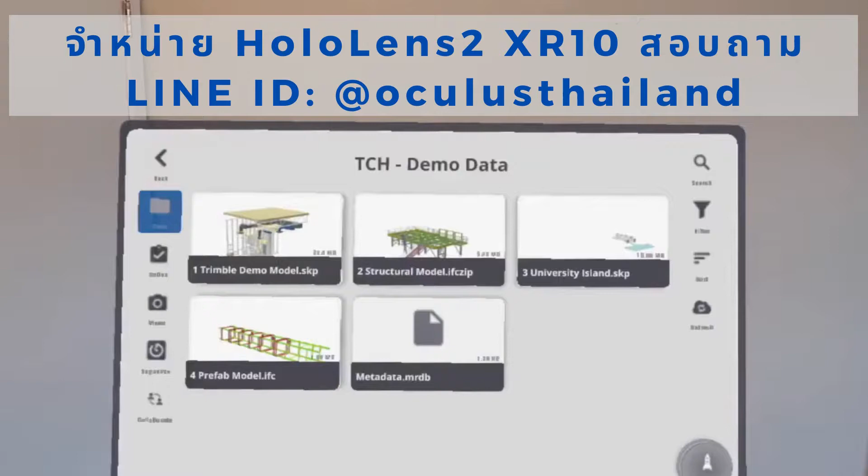Today I'm going to take a few minutes and demonstrate the Trimble XR10 headset utilizing Trimble Connect for HoloLens. To start out, within Trimble Connect we'll select our model and launch that model.

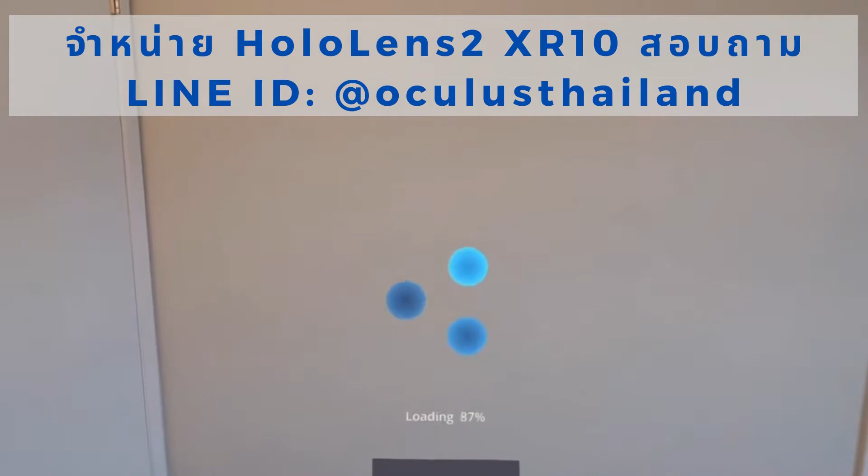The first thing the headset will ask us to do is spatially map our surroundings, getting a good look at the walls, the floor, and the ceiling where we're standing. Then we'll air tap to anchor that model wherever we'd like.

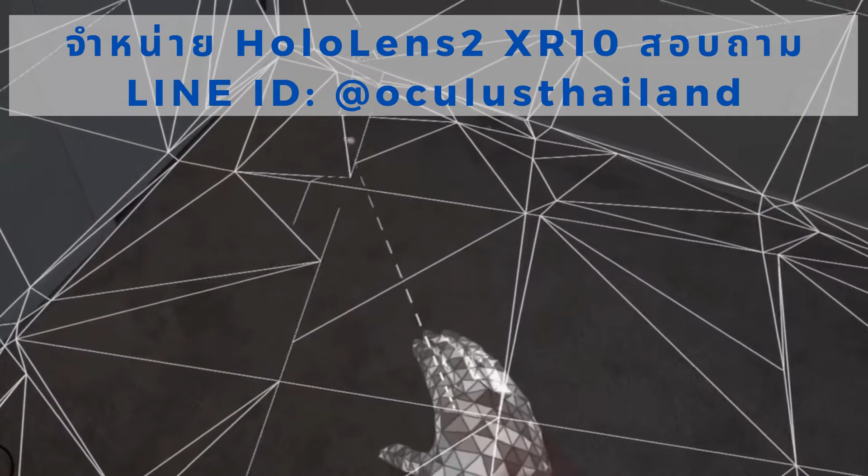I can anchor it onto the wall, but I'm going to choose to anchor it to the floor. I'll use my hand to do what we call a claw, and it'll now anchor the model to the floor.

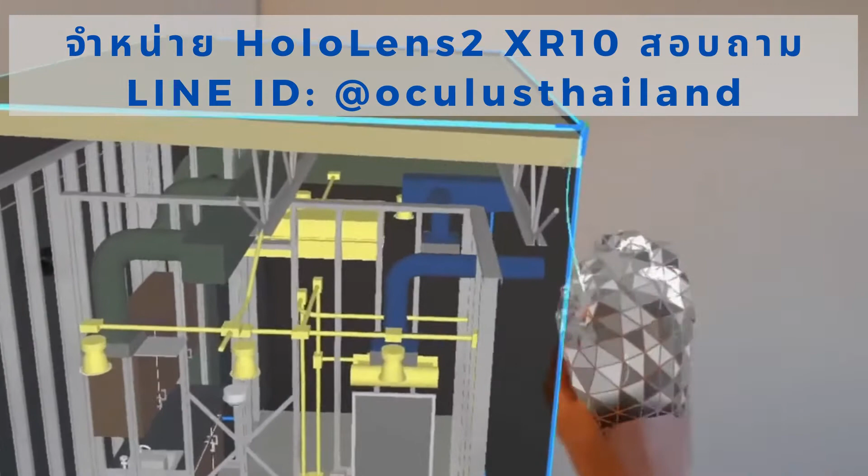Now I've got the model in front of me. I can use some hand gestures to manipulate it. I can reach to the corner and change the sizing. I can also reach and grab the orbs or spheres here to rotate my model as I see fit. And I can actually go right up to the model and use my hands to grab it and resize it that way as well.

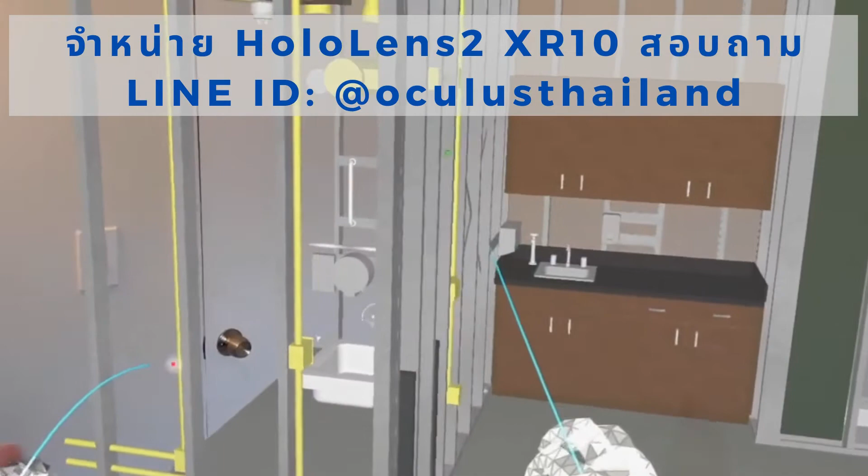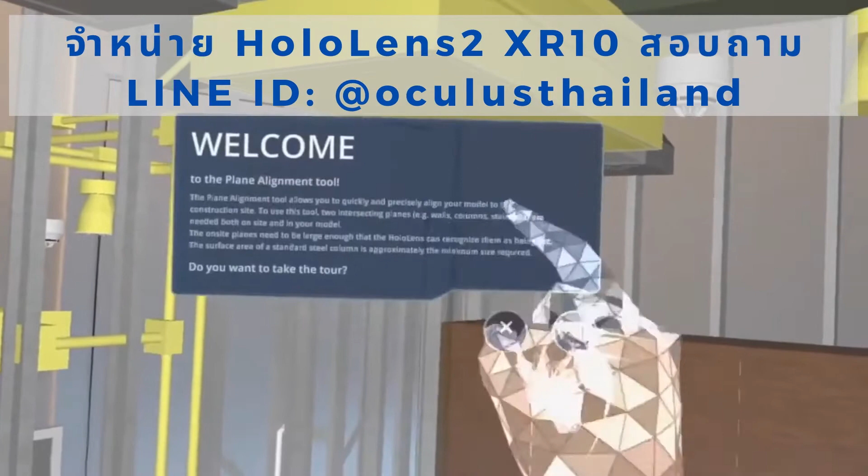Now if I want to put this model in 1:1 scale, I'll go to my menu by raising my hand, click Align, and click Align using planes. Then say Connect Done or air tap to complete the spatial mapping.

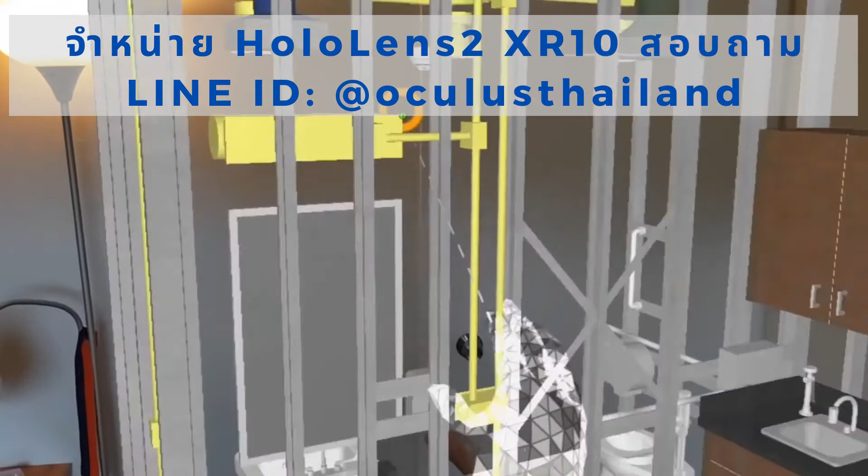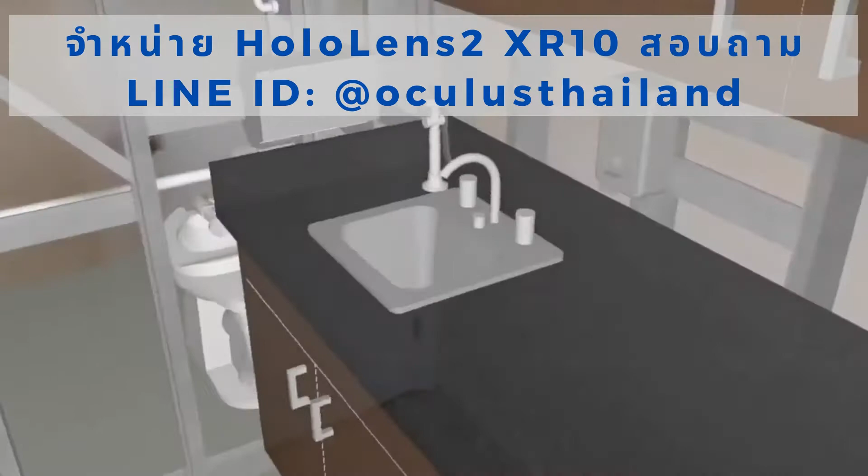The HoloLens has automatically detected the floors, so I'll say yes, use auto floors. Model aligned successfully. Now you can see that my model is aligned to my existing space, so I can see my model in 1:1 scale.

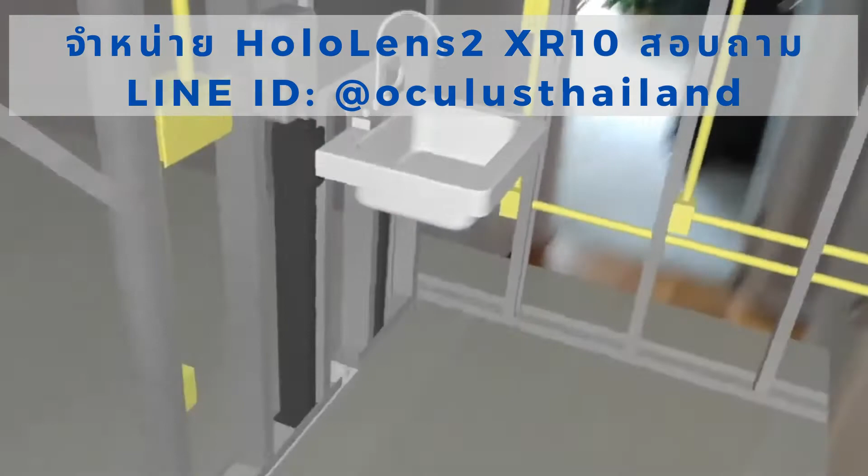I can actually see through my existing wall in my environment. You can see the opposite room there, which should be the bathroom area. If I open it up, I can see what that looks like on the other side, with the second room here. And on this side I have more of what would be my kitchen area with the countertop.

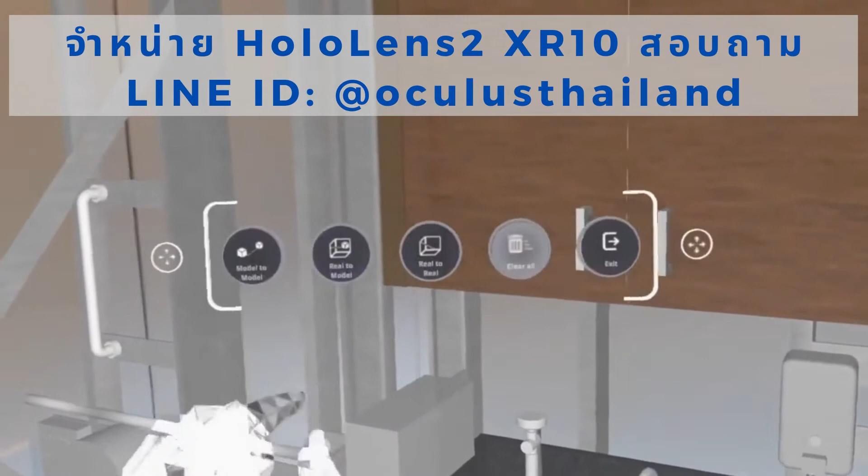The last thing I wanted to show was doing some basic measurements. If I go to my menu again and click my measure tool, I have a few different options: I can do model to model, real to model, or real to real.

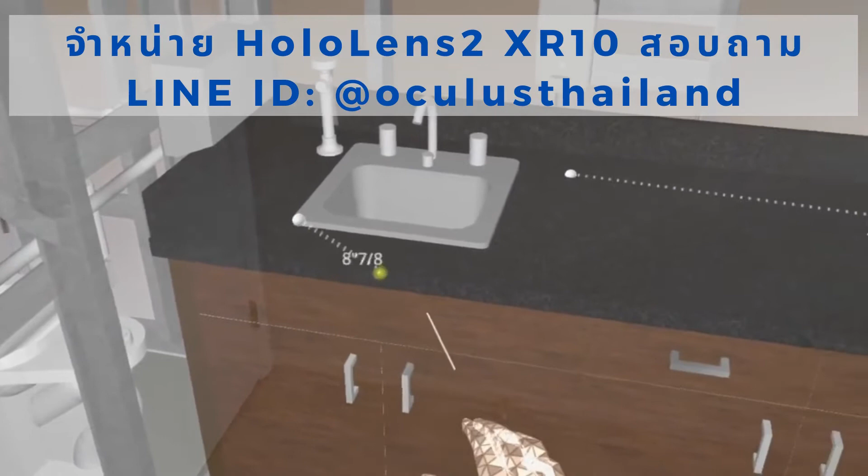Starting with model to model, I can pick a point on my countertop, for instance, and measure from there. I can get a general idea of how large the sink is. Notice it will snap to certain spots, like corners and ends of lines.

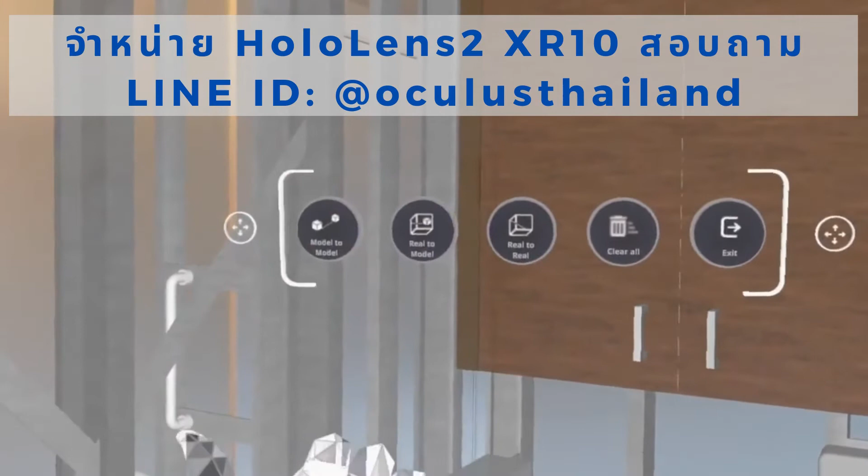Now if I go to my menu again and switch over to real to model, this will do measurements between my real environment and my model. So if I click a spot on my ceiling, I can measure the distance from my ceiling to the top of the countertop, about 5 feet 2 inches.

I can also go into my menu, go to real, and take measurements of my existing environment, either freehand, or I can choose my 90 degree option, which will do measurements across the X, Y, or the Z axes.

For instance, I can pick a spot on my ceiling, and then pick anywhere on the floor, and it's going to give me a direct Z measurement from the floor to the ceiling. You can see now I've got 8-foot ceilings in this room.